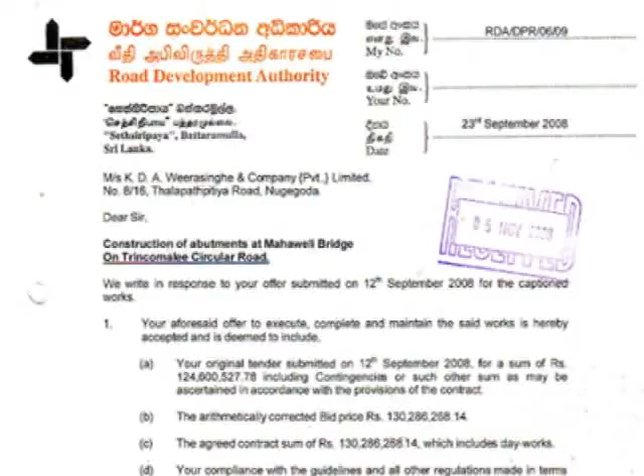Date of commencement 3rd October 2008. Original date of completion 20th February 2009. Revised date of completion 29th August 2009. Actual date of completion 29th August 2009. Project value Rupees 134,048,750.56.

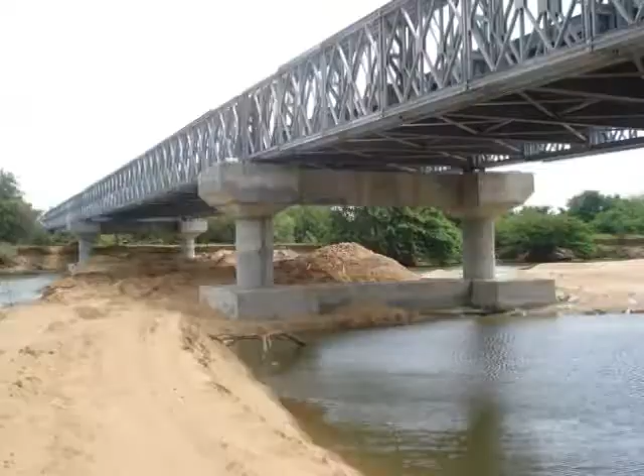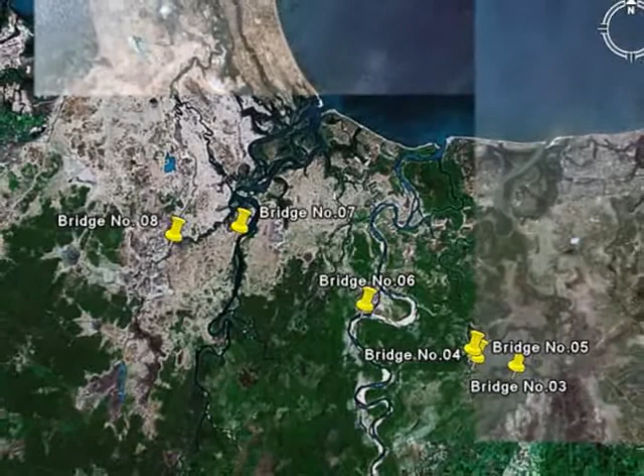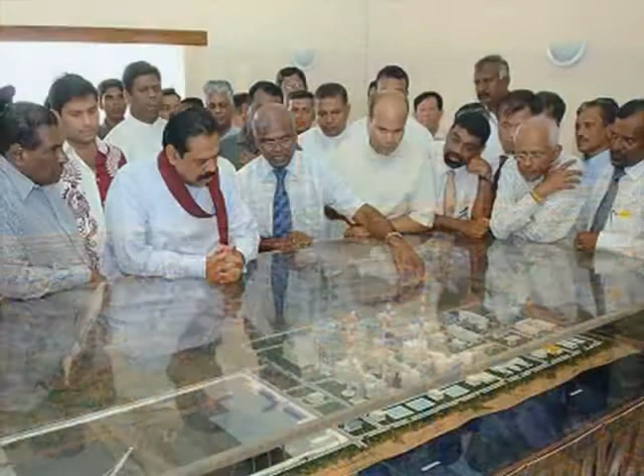The project comprised of the construction of Bridge Number 6 across the Mahaweli River along the Trincomalee Outer Circular Road of the Regional Bridge Project under the financial assistance of the British government. This 265-meter long steel bridge project was completed in August 2009. The bridge is a vital link that connects Sampur and Muttur, whilst there was only a barge available across the Mahaweli River to link the Sampur and Muttur area. One of the main purposes of this bridge is to reduce the travelling distance for transportation of raw material for the proposed coal power plant at Sampur.

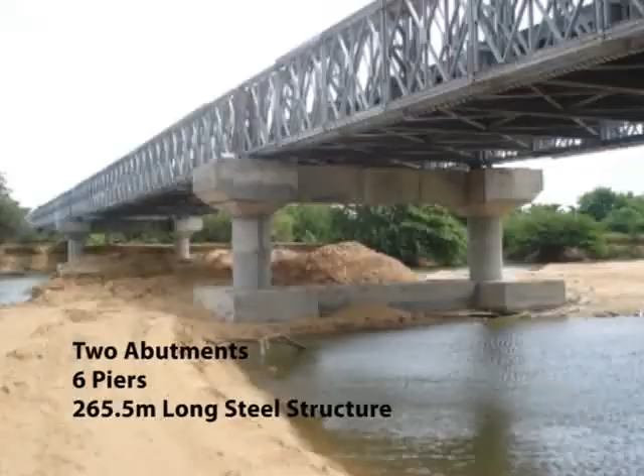Review and modification of the bridge design was also carried out by the KDAW. The project was so far the largest steel bridge project carried out by our company. It involved the construction of 2 abutments, 6 piers and 265.5 meter long steel structure.

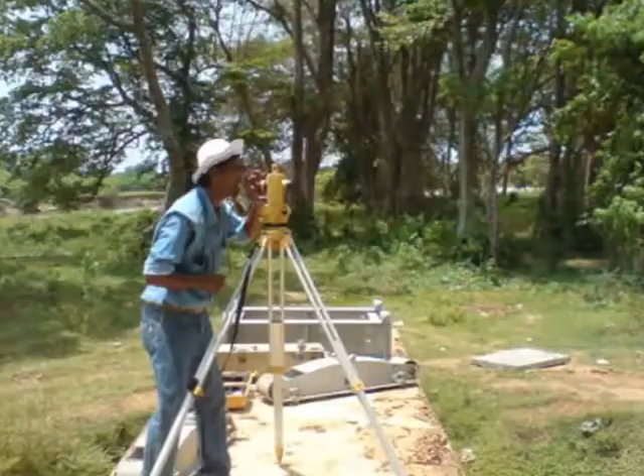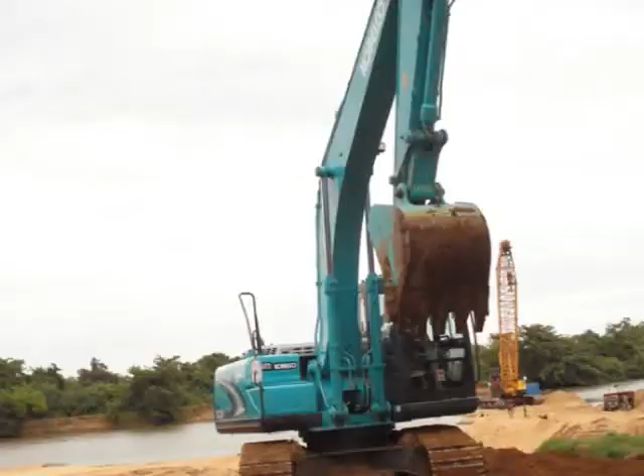Project implementation. In order to achieve the highly demanding target of completing the work within the stipulated period of 4 months, we prepared and implemented a tight construction program by deploying a team of experienced project staff backed by a well-trained, skilled workforce with required machinery and equipment to handle the project, thereby enabling the work to be carried out simultaneously.

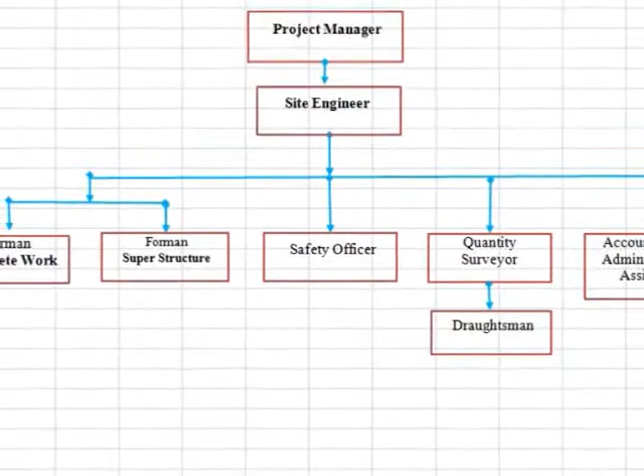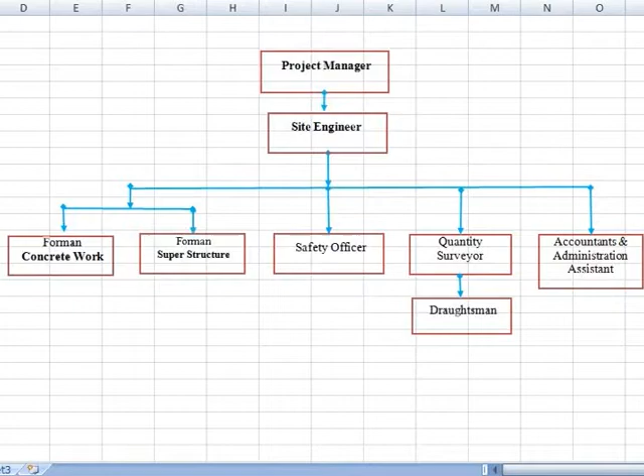Site organization. The site was managed by a project manager supported by a site engineer who provided all the necessary technical expertise. Qualified and experienced technical officers were deployed to assist the site engineer with experienced supervisors. A quantity surveyor was stationed at site assisted by a draftsman in preparing the interim valuations, variations and extra work claims, labour subcontract bills, etc.

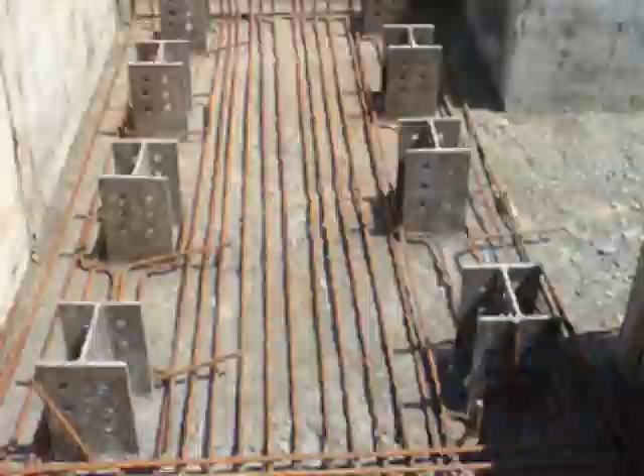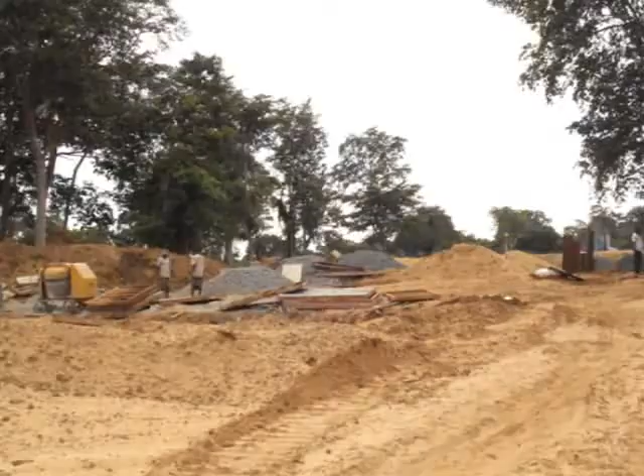Scope of work. The scope of construction work includes construction of 2 abutments at either side of the river, 6 piers on spread footing foundation and 2 piers on 15-meter long H-iron piles driven hard to soil, and erection and launching of steel superstructure having 265.5 meters. The preparatory work involved clearing and grubbing and preparation of access road to pier location and coffer dam, ordering of steel structure and transportation of H-piles to site.

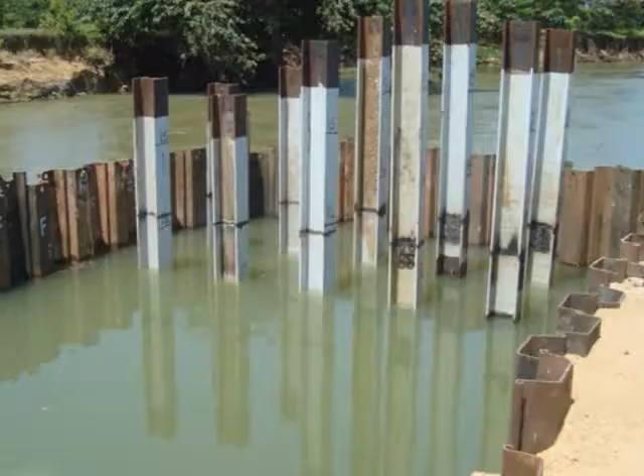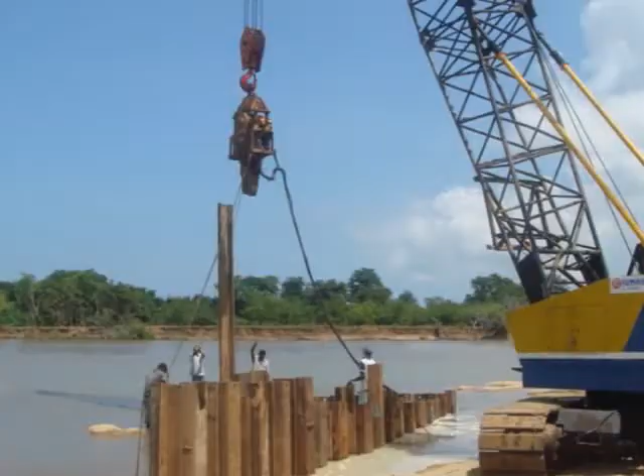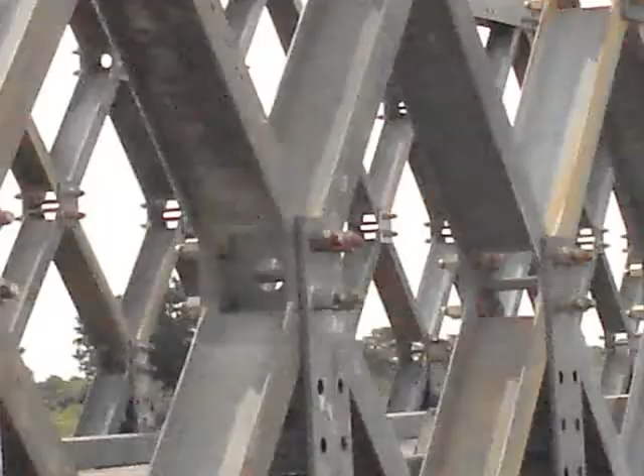After completing the preparatory work, the major construction work started in pier number 5 and 6, which was designed with H-iron pile foundation. Then, construction of the rest of the piers and 2 abutments designed with spread footing foundation commenced, and it consisted of construction of coffer dams, excavation, base preparation and construction of foundation slab, pier shaft and capping beam. Superstructure works involved erecting, launching and jacking the steel structure as per guidance of the Mabey and Johnson manual.

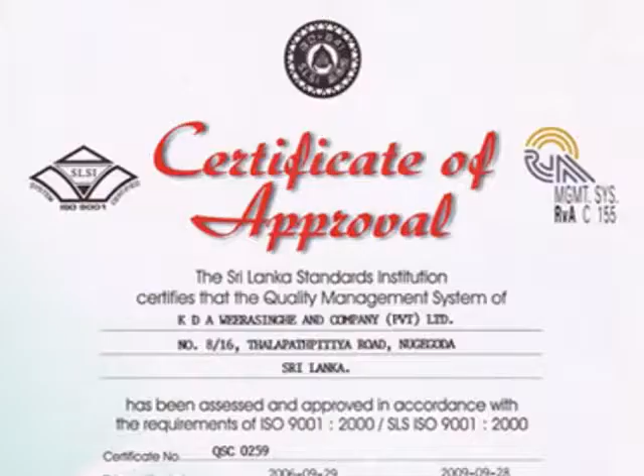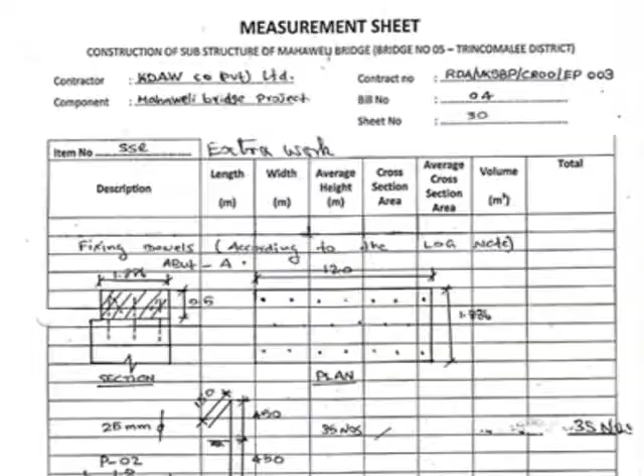Quality control. Since this was a quality control based contract, our project quality control in charge took the responsibility of maintaining, controlling and assuring quality. This was achieved by implementing quality control procedures and tests pertaining to soil, pile driving, concreting and superstructure.

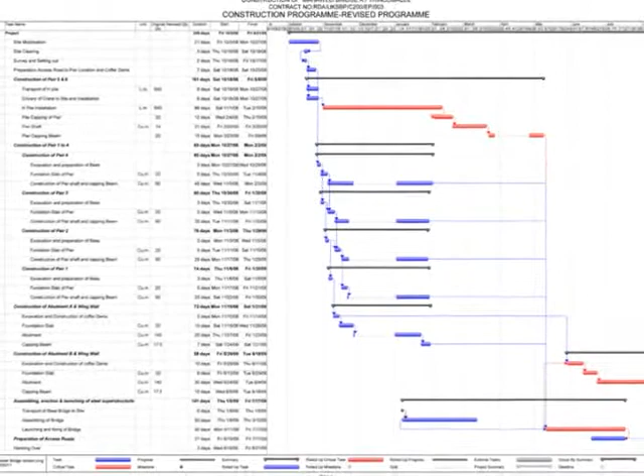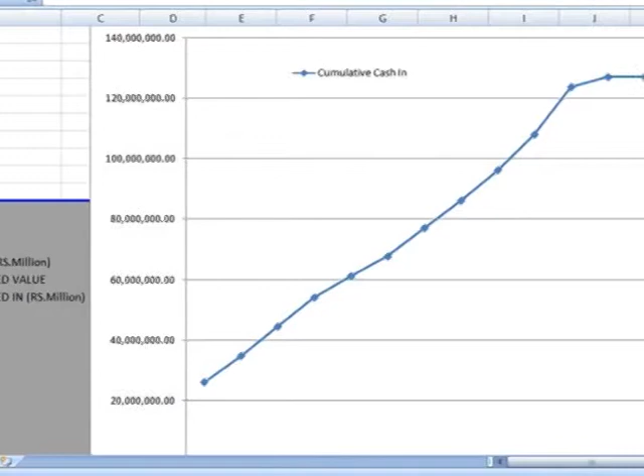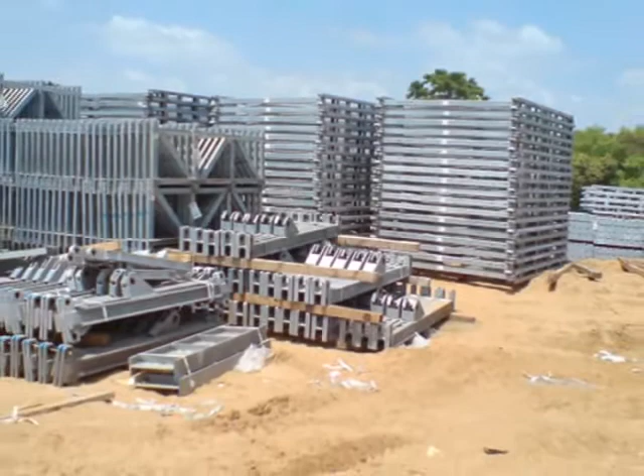Progress and financial management. The project manager ensured the progress of work was maintained according to the project master program while adhering to the project cash flow forecast. The project team managed to stay in the planned progress of work throughout a substantial portion of the project. Material supply. Steel superstructure was purchased from Messrs. Mabey and Johnson Limited in the United Kingdom. All concrete used for this project was prepared by volume batching at site.

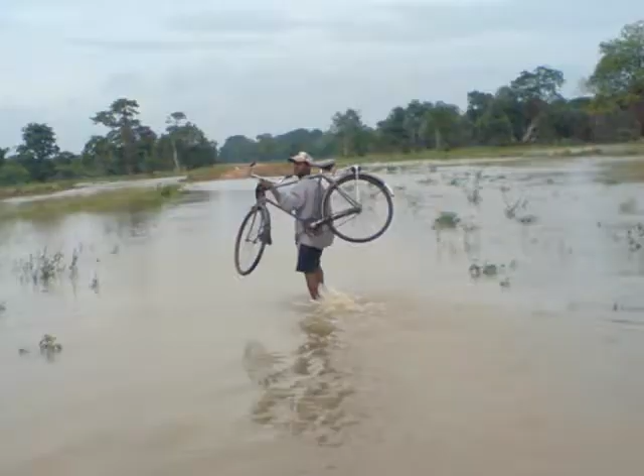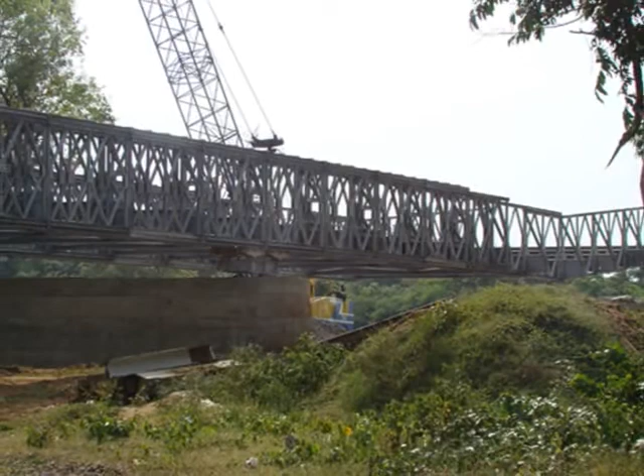Other challenges. As the site was located in a security hazard area, the construction was carried out under security provided by the Sri Lankan Navy. This was the biggest challenge faced by the project team. Furthermore, the increasing water level of the river resulting in flooded site, which was beyond the acceptable patterns, also resulted in delays. Labour supply. The majority of the labour force comprised workers from the local communities.

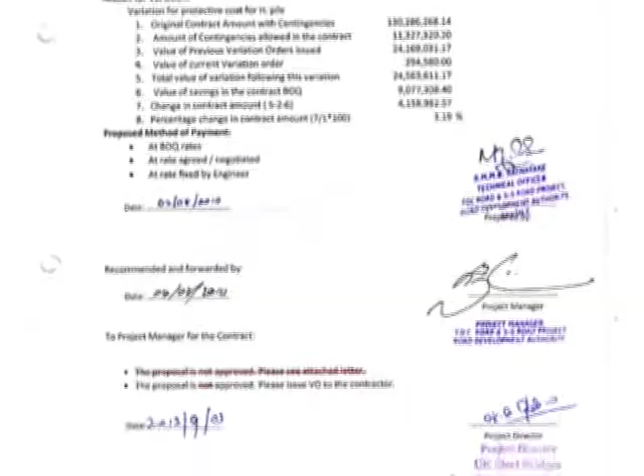Completion. The changes in work scope and obtaining the extra works resulted in the completion date being officially extended to 29th August 2010, and the bridge was handed over to the Road Development Authority in time at a final cost of 134 million rupees.